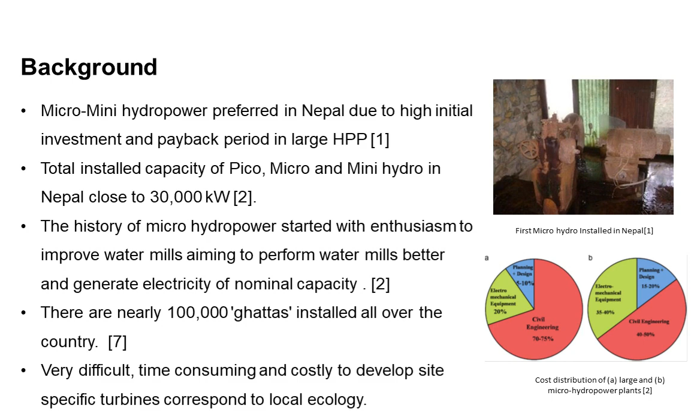So since the turbines fall into this category, if a PAT can be utilized, then the payback period can be reduced and profit generation can also improve. Also, in places having nominal capacity to generate electricity, it can be very effective.

In the Pelton turbine, it is a bit of a complex arrangement since there are normally three or four jets, and there is a casing present and there are nozzles. So it is a kind of complicated arrangement if we think of micro, mini, or pico hydropower plants; the arrangement becomes very complex.

And then in the Francis turbine, more number of components are present and it is more expensive than the cross flow turbine.

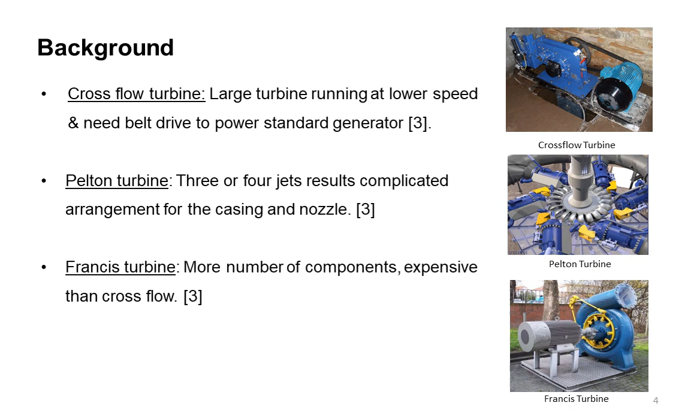So when we talk about PAT, or pump as turbine, it is low in cost, the complexity is less, and since the pumps are produced in mass, unlike the turbines, it is easily available and also the spare parts are available.

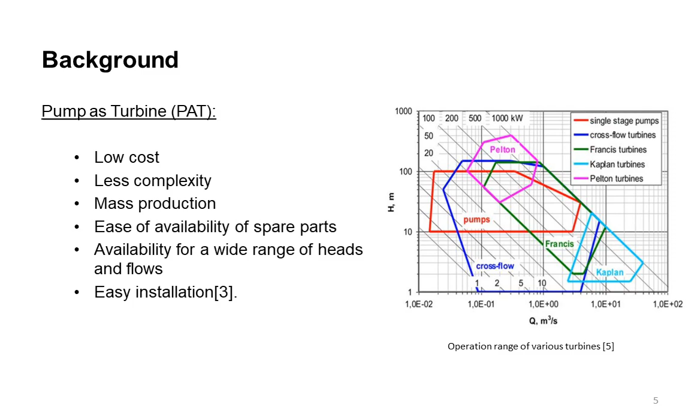The past researches that have been done in this field are presented here. The efficiency of PAT is usually found lower than the conventional hydro turbines, which is correct because the turbines are site specific and are made to maximize the efficiency, whereas the pumps are not.

The maximum turbine efficiency obtained from a PAT is nearly 76%, which is comparable to the efficiency of cross-flow turbine and is satisfactory.

Also, efficiency of 80 to 100% can be obtained for fixed load applications in case of PAT, and PAT in the range of 1 to 500 kilowatt. The payback period is just 2 years.

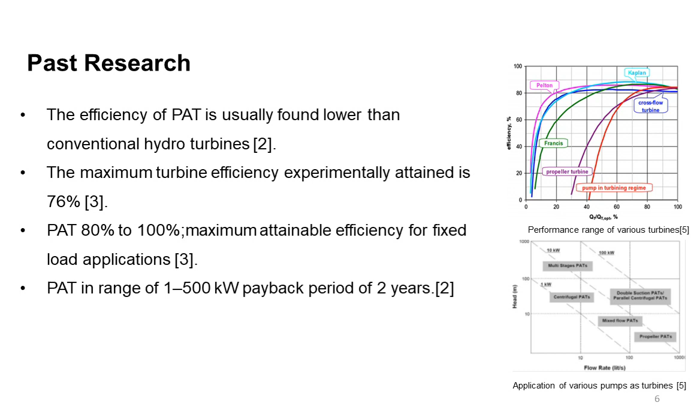It shows that efficiency is very comparable, and the application of various pumps as turbines is shown in the figure below, where different types of pumps can be utilized based on head and flow rate. For example, centrifugal pumps can be used in the head range of 10 to 100 meters and flow rate of 10 to 100 liters per second very effectively. Mixed flow pumps can also be used in this region. The graph shows the application of various pumps as turbines and in which region each operates well.

The research motivation for performing this research was that the performance evaluation of pumps in both direct and reverse mode, for pumps readily available in the Nepalese market, had not been performed under laboratory conditions. The importance of PAT in micro and mini hydropower has not been realized in Nepal yet, but it has been realized and practiced in other countries.

The prospect of replacing traditional water mills with PAT has not been studied. As mentioned earlier, there are 100,000 traditional water mills in Nepal, some operating and some not. The prospect of replacing those traditional mills with PAT has not been studied in Nepal. If replaced, nominal electricity could be generated, which could be very beneficial for rural community people.

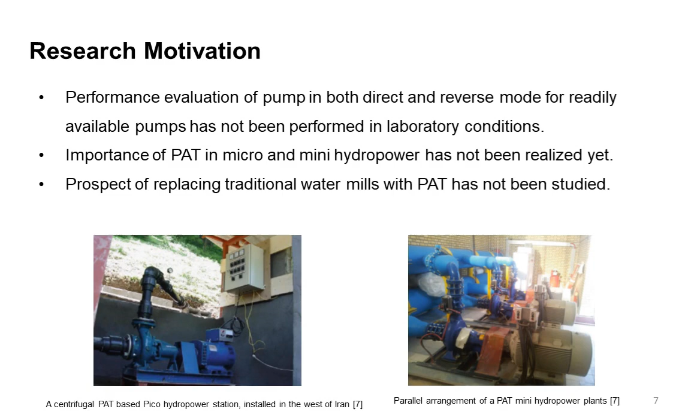So the objectives set during our project were: identification of a suitable pump for laboratory testing in direct and reverse mode, experimental testing of the pump in both pump and turbine mode under laboratory conditions, and to develop a reference test rig for pump as turbine inside the turbine testing lab.

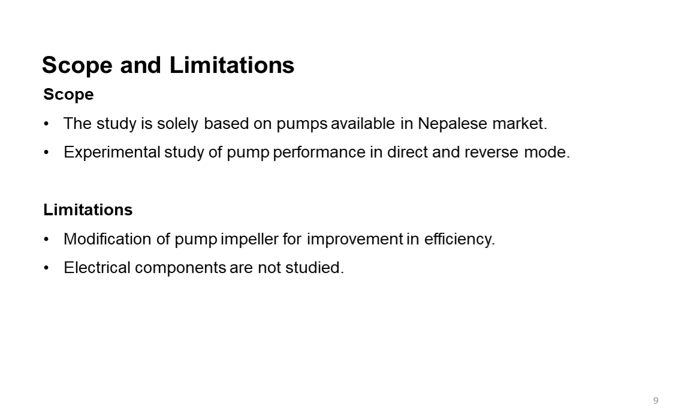The scope and limitations of our project include that the study is solely based on pumps available in the Nepalese market, and the experimental study of pump performance in direct and reverse mode. The limitations include that modification of the pump impeller for efficiency improvement was not carried out, and electrical components were not studied during the period.

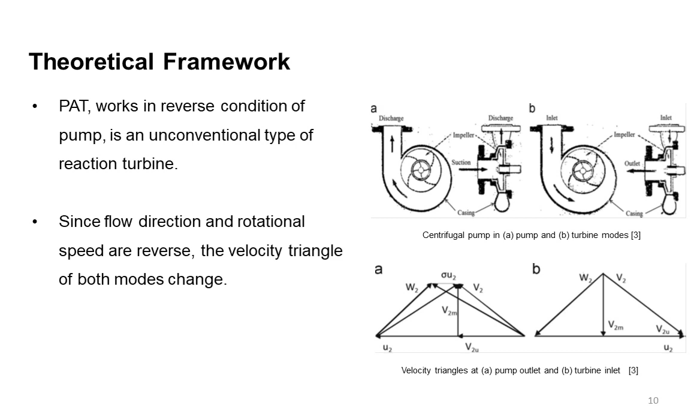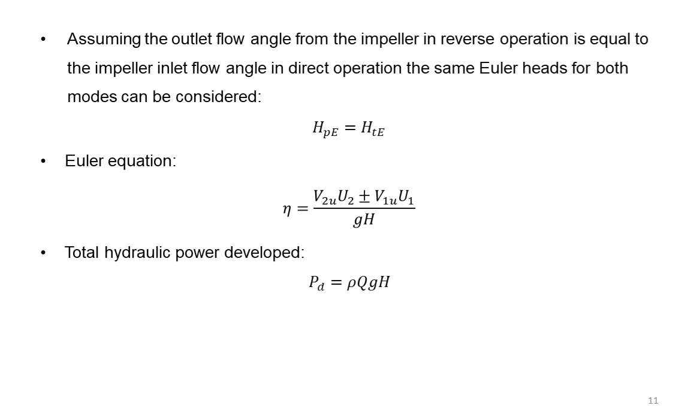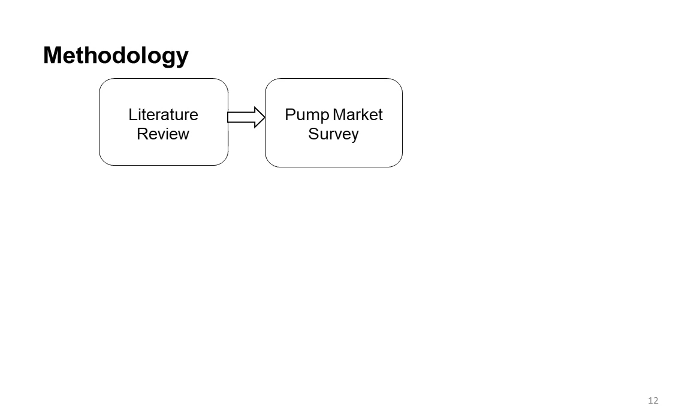The methodology during the process included literature review. First, different types of pumps were studied, followed by selection of a suitable pump to operate in both modes. A pump market survey was done to see if the pump was readily available or not.

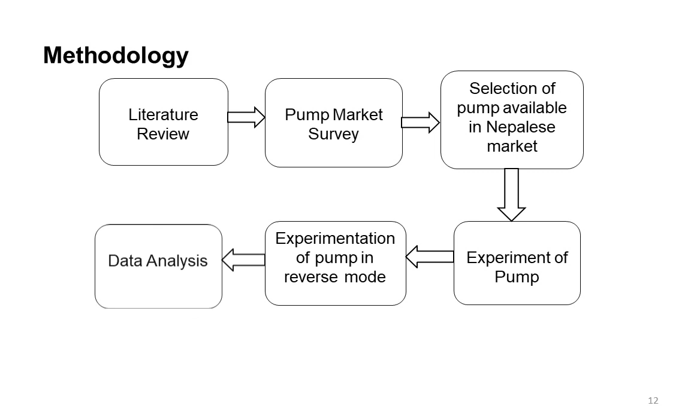The selection of a pump available in the Nepalese market was done, followed by experimentation of the pump in direct mode, then experimentation of the pump in turbine mode inside TTL, followed by data analysis of the results collected during both experiments, and finally a conclusion was drawn based on the analyzed data.

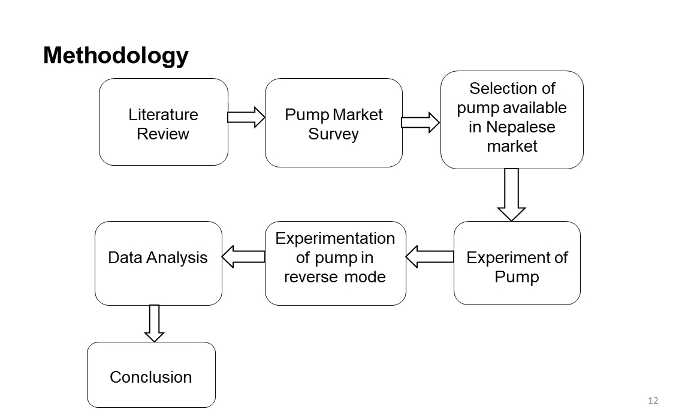The schematic diagram of the setup in pump mode and turbine mode is shown here. In the first picture, the schematic diagram for experimental testing of the pump in direct mode is shown, where the setup includes a pump to be tested, a pressure gauge for pressure measurement, a flow meter for flow measurement, and a butterfly valve for regulating the flow. A dump load was used — a Francis turbine served as the dump load — and there is a sump from where water is circulated throughout the system.

In the schematic diagram for pump testing in reverse mode, there is the pump room at TTL, a barometer, a high pressure tank which pressurizes the water before entering the turbine, a flow meter for flow measurement, valves for regulating the flow, the turbine which is the PAT, and the reservoir from where water is circulated throughout the system.

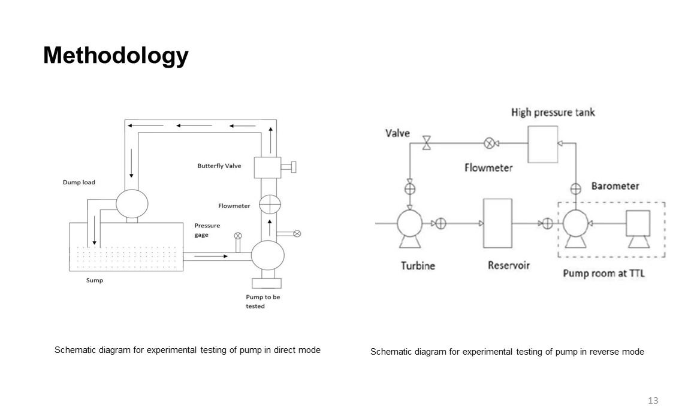So the literature review that we performed in the course of the project is shown here. Regenerative pump turbine was studied, and since it is high pressure and small capacity, it was discarded from being used as a PAT. Then we studied the semi-open impeller, which was for viscous fluid, and it is not applicable for water.

Industrial impeller was studied, which was a closed type impeller. Finally, we selected a 3.75 kilowatt end suction centrifugal pump with specific speed 43.42. It was a closed type impeller, similar to a high head Francis runner. We also studied fundamental theory of pump used as turbine, past researches made on PAT, and modification in the pump impeller for efficiency improvement. These things were studied during the course of time.

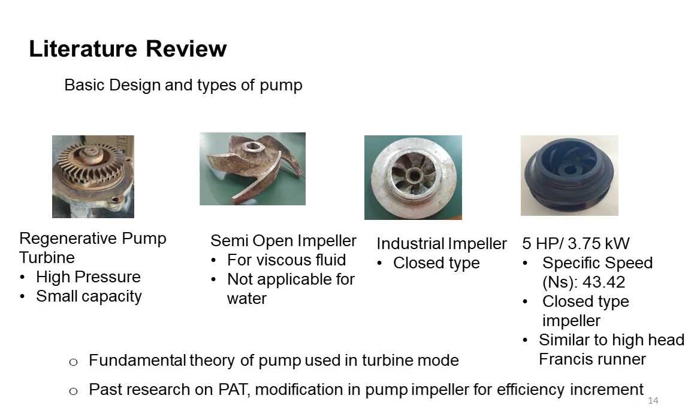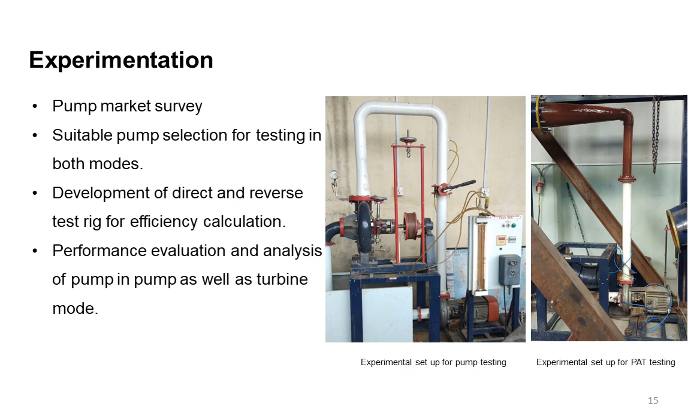For the experimentation phase, after the pump market survey was done, a suitable pump was selected for testing in both modes, and development of direct and reverse test rig for efficiency calculation was done. The first picture shows the experimental setup for pump testing, where the pump is seen in the bottom portion, and the same setup was taken inside the turbine testing lab and tested in the turbine mode. Then the performance evaluation and analysis of pump in both modes was carried out. The results that we obtained are shown here.

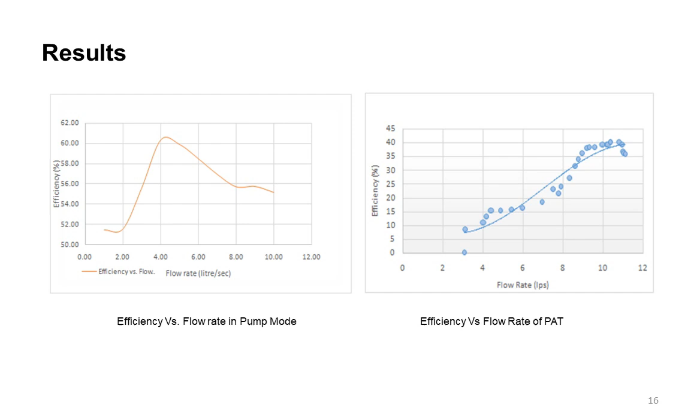The comparison of head versus flow rate in the pump and head versus flow rate in the PAT is shown here, where in the pump, as the flow rate increases, the head kept on decreasing. When the flow rate was 4 liters per second, the pump head was 18 meters, and it kept decreasing until a head of nearly 2 meters was attained when the flow rate was 12 liters per second.

Similarly, in the case of a PAT, as the flow rate increased, the head attained kept on increasing. When the flow rate was 3 liters per second, 1 meter head was attained, whereas when the flow rate reached 11 liters per second, a maximum head of about 12 meters was achieved.

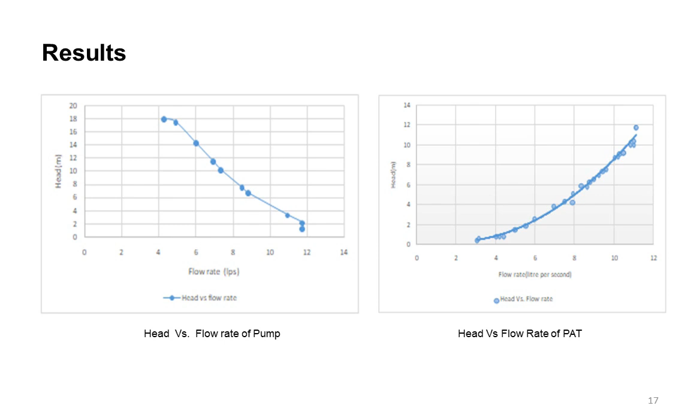The output power versus input power of the PAT is shown in the first figure, where as the input power keeps increasing, the output power also keeps increasing, reaching a point where 0.45 kilowatt output power is achieved when the input power was 1.3 kilowatt. In the case of output power versus head of PAT, as the head keeps increasing, the same output power of 0.45 kilowatt was attained when the head was 12 meters.

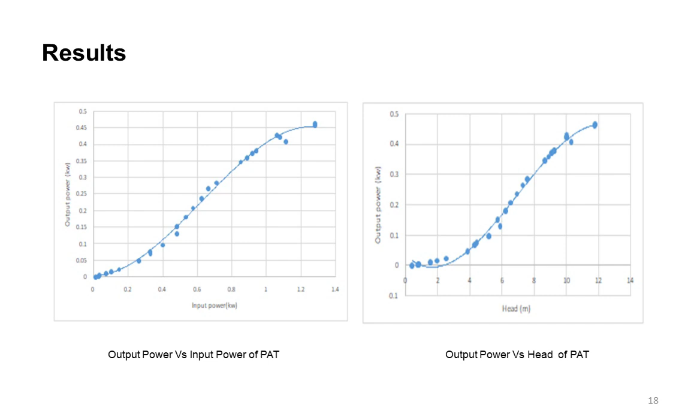This slide shows the efficiency versus flow rate at various RPM, and head versus flow rate at different RPM, of the pump. It is clear that as the flow rate increased, the efficiency obtained from the pump also kept increasing, and at an RPM of nearly 2750, maximum efficiency was obtained, which was 60% at a flow rate of 11 liters per second. Similarly, a head of 21 meters was obtained when the flow rate was nearly 8 liters per second at the same RPM of 2750.

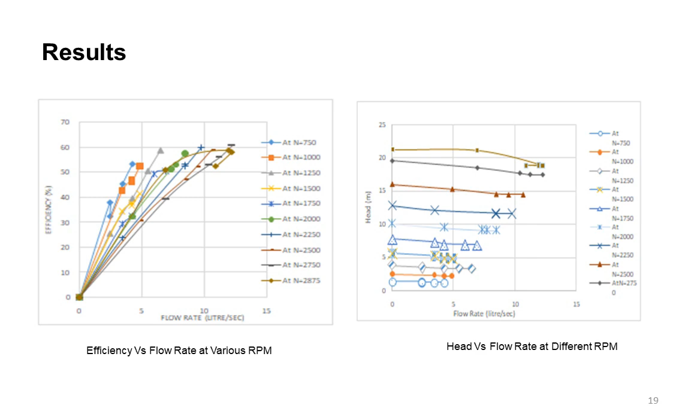So the conclusion of the research is shown in this slide. The maximum efficiency of the pump was obtained as 60.85% in the direct mode, which is comparable to the rated efficiency of the pump, and it was obtained at the best efficiency point where the head was 17 meters and a discharge of 17 liters per second.

Then in the case of pump as turbine, maximum efficiency of 40.15% was obtained at a flow of 11.5 liters per second and at a head of 10 meters, which shows that the centrifugal pump can satisfactorily operate in turbine mode without any modifications, and there is a huge prospect of introducing PAT in mini and micro hydropower of Nepal, replacing the traditional water mills with PAT.

Since I mentioned in the second slide that there are 100,000 traditional water mills present throughout the country, there is a huge prospect of replacing these traditional water mills with the PAT so that nominal electricity can be generated at areas like this.

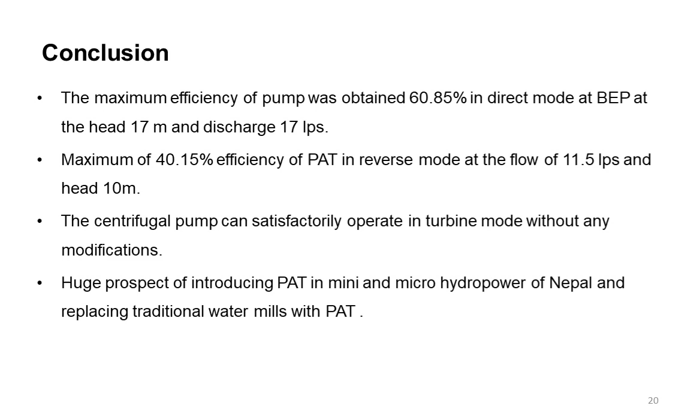Also, the future work and recommendation is that to achieve higher efficiency of the turbine, it is recommended that the turbine be tested in full flow conditions, and modification techniques like rounding of the blade, inner and outer shroud, and rounding of the impeller inlet are vital for improvement of efficiency. With proper modification and laboratory testing, the scope of the project can even go up to installation in suitable sites, such as pico hydropower stations or places where there are traditional water mills.

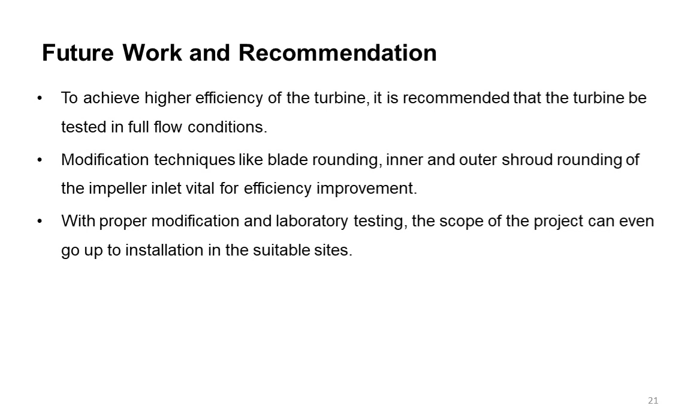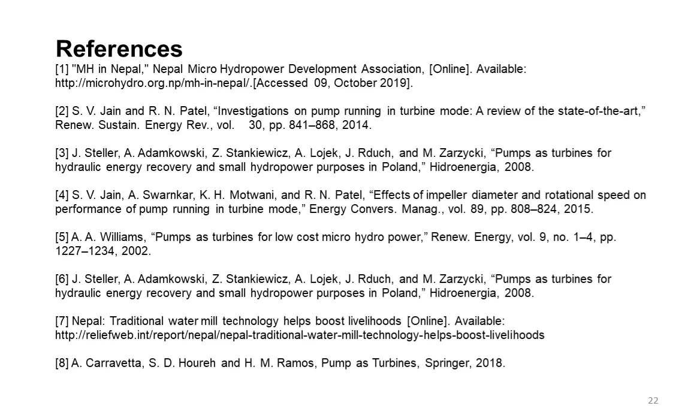And these are the references that we referred to during the project period for literature review and for efficiency improvement studies. Thank you for your attention.